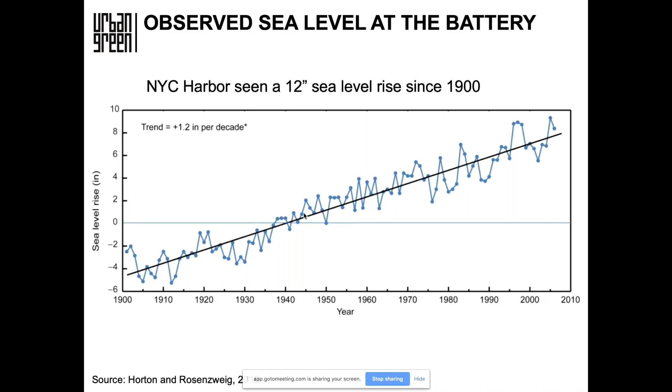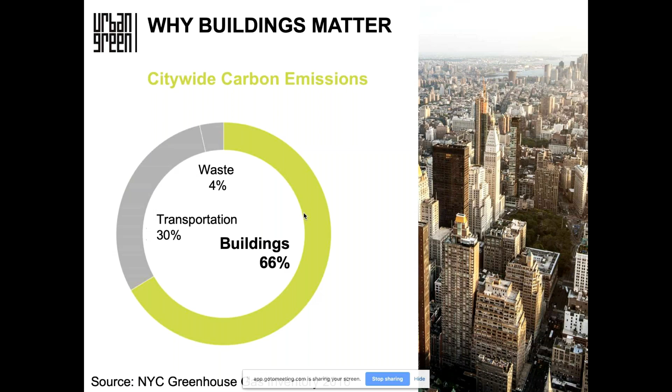In New York City, given our really robust public transportation system, climate change is driven primarily by buildings: the fuels that we burn in the buildings and the electricity we use there. The numbers are different if we were talking the US nationally. About a decade ago, we started working on building policy in New York. We realized something quite dramatic when we looked at the data. Although there's 1 million buildings in New York, a very, very small number of them actually represented most of the square footage and most of the greenhouse gas emissions.

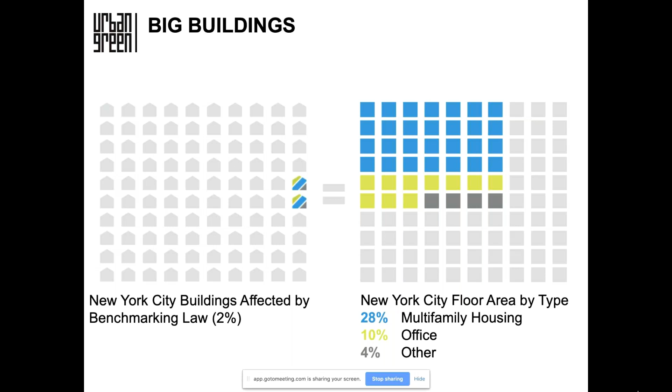And so just 2% of the buildings in New York, or about 16,000 properties, is about half the square footage of New York and about half the emissions. These are the buildings over 50,000 square feet or 4,600 square meters. And if you reduce that a little further to the buildings over 25,000 square feet, or 2,300 square meters, that's almost 60% of the greenhouse gas emissions and energy used in New York City. So the things I'm going to be talking about in this presentation are all focused on these big buildings.

One of the things that may be a little different about New York City than some of your jurisdictions is that the things we'll discuss were all laws or policies enacted by the city itself. We have the power to enact laws on anything that the state or the federal government hasn't already enacted laws on or is somehow preventing us from doing. So we have our own building code, our own energy code, consumer affairs provisions, we can create misdemeanors. So all these policies we can do here.

I'm going to go back in time a little bit and just talk briefly about the almost decade that we spent in New York City really experimenting with the question of whether more information would drive market forces to make economic decisions that would drive energy efficiency. And those are encapsulated in a number of laws affecting these big buildings I've referenced. The first is a requirement that the big buildings measure their energy and water use every year.

And the theory behind this was that would enable these owners to start comparing. They could compare their building to their neighbors. They could compare the building to other buildings in their portfolio. They could compare their building to itself in past years. And if their building is using more energy, they can start asking themselves, what's different about my building? Maybe see an opportunity to save money. And if they've done things and they are seeing savings, they can verify that stuff's working.

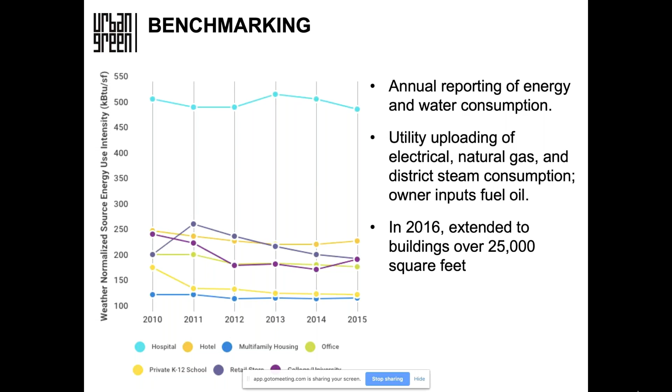The second law is one that requires these big buildings to do an audit and retrocommissioning every 10 years. An audit is an assessment by a consultant of capital systems in a building. They go through and identify opportunities to improve those and save money. And commissioning is retuning of buildings, the same way you would retune a car.

You go through, change fans, change belts, filters, check that valves that are supposed to be open are open, and those supposed to be closed are closed. It's very customized to individual buildings. The primary concern when this law was passed was that there would not be enough professionals to do this work because it was highly specialized.

And what we've seen over this almost decade was there was actually a flood in the market. People entered the market to provide these services at the level that owners wanted, and most owners wanted just to comply with the law. So we saw a commoditization of audits and commissioning services in New York. The average one is not as robust as it was before these laws came into effect.

What we did get that's immensely valuable from these laws is a much deeper understanding of how energy is used in big buildings in New York City. Urban Green analyzes this information every year in conjunction with the city. For example, on the screen you can see our estimate of energy use breakdowns in various building types in New York. That has been immensely valuable as we've advanced policy in the city.

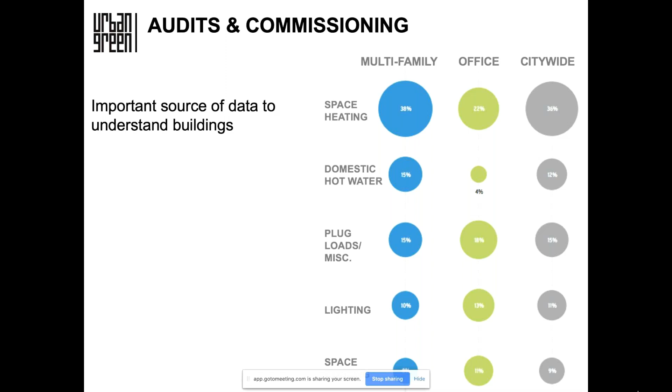And the final law I mentioned is a requirement for buildings to sub-meter their electricity uses in commercial tenant spaces and in common spaces and report the usage to the tenants, whether or not they're billed according to that energy, and a requirement for upgrades to lighting. These laws give owners until 2025 to comply, so it's a pretty long lead time there.

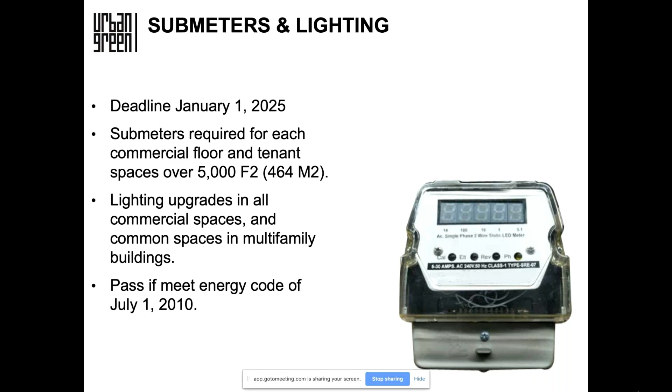These laws have been immensely popular across the United States. There are now about 20 jurisdictions that have some form of benchmarking. Others are doing things like audits and commissioning. The question we asked ourselves, and many people were asking a couple of years back, is what did these add up to? On first blush in New York City, we've seen significant reductions: energy use down about 10% from 2010 to 2015, and greenhouse gas emissions down about 14%.

But when you look under the hood, the situation is not quite as rosy as we might hope from an energy efficiency perspective. About half that reduction is because the power plants got more efficient and produced less carbon. Of what remained, another quarter was fuel switching within the buildings: they stopped burning oil and switched to natural gas, which is cleaner. So only about a quarter of this reduction is due to energy efficiency measures.

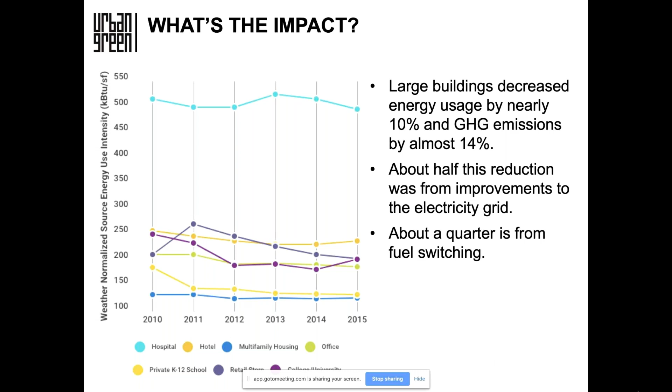This led to a widespread sense that we need to do more, that we're not on pace to address climate change, and that culminated in an announcement by the New York City Mayor in the fall of 2017 that New York City would enact some sort of mandate to reduce energy use in large existing buildings. As I mentioned, there was a lot of agreement. We need to do something different.

What there was not agreement about was the structure, because there was going to be a big price tag to this. So who's going to pay for that? Is it going to be government? Are they going to subsidize it? Is it going to be the owners? Are owners going to just pass these costs on to tenants? That was a huge political question.

And within these big buildings, we have extraordinarily important ones to the social functioning of the city. We have affordable housing, hospitals, schools, religious institutions. How would they fare under the system? And we had a policy structure that was going to impact trillions of dollars and hundreds of thousands of people who work in these industries.

How are we going to figure out all the details of that? So a lot of disagreement. Urban Green stepped into this challenge and brought together the city's building and energy stakeholders for something called the 80 by 50 Buildings Partnership. And we produced a report with recommendations on the policy structure called the Blueprint for Efficiency.

And I can kind of jump to the conclusion and tell you this worked. We had all the stakeholders, all the major ones involved, endorsed our recommendations and endorsed this blueprint, and it was a major influencer on the law that was passed in New York.

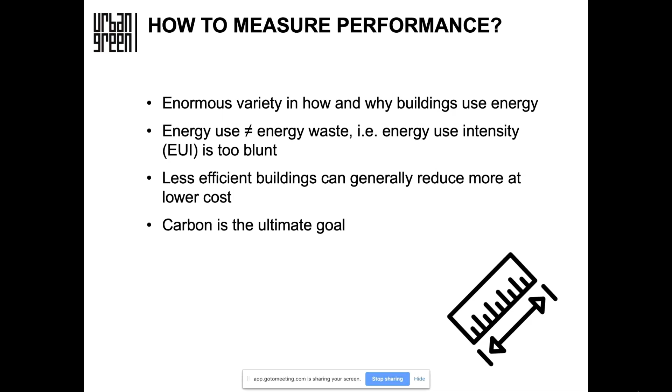So the group weighed many different paths based on different metrics. In very broad terms, those structures fell into 3 camps. The first is a percent reduction approach. That is a uniform percentage reduction applied to buildings across all sectors or in particular sectors. That's a typical approach in a lot of voluntary programs, some of the incentive programs that exist here in New York and elsewhere. And the advantage of that approach is that it meets buildings where they are.

It inherently accounts for the unique aspects of their energy profile. The disadvantage is that it penalizes early adopters. It doesn't account for progress that they have made prior to the policy because it applies a uniform reduction across all buildings. Similarly, it doesn't apply greater reductions to poorer performers, so there may be savings left on the table.

The second path the group considered was a hard cap, or a single limit applicable to all buildings, and having all buildings need to reach that limit and get below it. The advantage there is, on the one hand, a single standard has the virtue of clarity. It also squeezes more from those that are farther above the cap, so it requires greater reductions from potentially less efficient buildings. On the other hand, it's a one-size-fits-all approach. It doesn't account for those many factors that influence energy use.

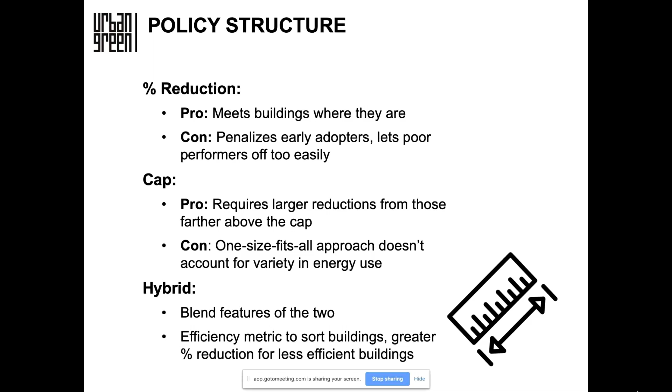A third major question of the policy framework was how far, how fast, or how much should buildings reduce, and by when? Here the guiding star was a stringency that is ambitious but achievable. To put some detail on that, the group looked to existing retrofit programs, what had actually been achieved in large-scale retrofit programs, what was possible based on existing technology, and energy modeling and projections of what's feasible in deep energy retrofits. With that in mind, the group defined a maximum and minimum range that seemed feasible, and that landed at around 20% source energy reduction.

The timeline was, of course, also a critical issue, and the focus here was allowing sufficient time to make retrofits cost effective. That means primarily allowing time for owners to align the work with natural financing cycles, the points when equipment needs to be replaced, and when tenants are moving in and out of units. It also means allowing time to properly sequence and plan projects, and for such a massive industry transition, some time to adapt. Lastly, the group was very focused on enabling a phased compliance timeline to avoid a scenario where you have 50,000 buildings, in the case of New York, all seeking compliance in the year before the compliance year.

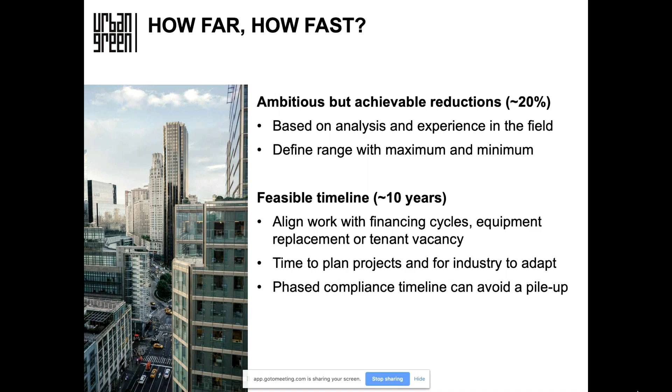The second major chapter was focused on special cases. The aim here was to ask which sectors need some form of unique treatment. Part of that is that some sectors need more help. Russell alluded to this, and we were focused in particular on affordable housing, mission-driven nonprofits, and some of the other public interest sectors. They face particular financial and regulatory constraints that make building upgrades more challenging, and there are potential affordability implications. So there need to be unique compliance paths and/or dedicated financing and technical assistance to make sure those sectors can achieve the reductions.

On the flip side, government buildings have typically led on green building, and the group focused on ways for that to apply in the context of an energy performance policy as well. Here we're talking about deep energy retrofits at a scale that is really unproven, so there's a need for some sort of proving ground to shine a light for industry and illuminate costs, risks, and solutions. That meant requiring government buildings to go farther and/or faster, to do deeper reductions, potentially on a sooner timeline.

The third chapter focuses on allowing flexibility. The challenge of this section was how to enable flexibility for owners and the market at large to unlock the lowest cost path to carbon savings, that is, to reach the same end target in the most cost-effective manner. The group considered two principal means of achieving that. The first is trading, meaning trading energy efficiency credits or carbon credits between buildings, so buildings with a higher cost of energy or carbon reduction can buy credits from a building with a lower cost.

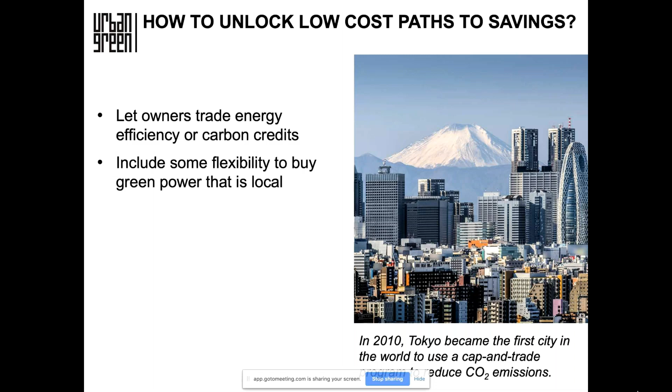And then our final chapter focuses on making efficiency easier. And the premise guiding this chapter is that the ambitious nature of our climate goals is really unprecedented. And so we are talking about an unprecedented scaling up of retrofits. And that requires an equal mobilization of support to help owners reach those goals. That means money in the form of incentives, loans, grants. It also means technical assistance to ensure they have the technical know-how and the resources to implement retrofits effectively.

And lastly, in a standard part of the Urban Green Playbook, when we look to add regulatory burden or pass or influence new laws or policies, we also look for opportunities to lighten burden in ways that make sense, in smart ways. As many regulations get stale over time, they aren't updated for a decade or two. So the aim here is to find smart opportunities to revise existing regulations and thus free up resources and money that can then flow towards retrofits. So that's the blueprint in a nutshell.

I'm now going to fast forward 8 or 9 months later to April 2019, where after a legislative process, typical of a big complex piece of law, New York City passed a groundbreaking building emissions law. In New York, the law is called Local Law 97. It was part of what New York called the Climate Mobilization Act, which was a package of environmental laws all passed at the same time. It was also branded New York City's Green New Deal in a nod to the political moment that we're in.

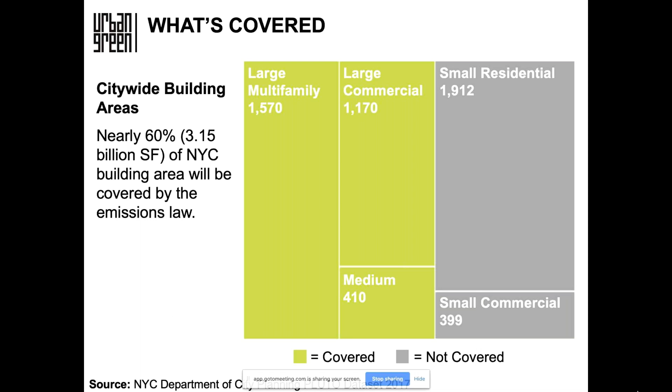The emissions limits that are the centerpiece of the law are based on carbon intensity of whole building energy use. That's all the energy used in a building. So that is a raw carbon intensity metric. It's a measure of metric tons of carbon dioxide equivalent per square foot. And the law sets 10 different intensity limits for 10 different building code occupancy groups. So it differentiates between different uses on the basis of building occupancy.

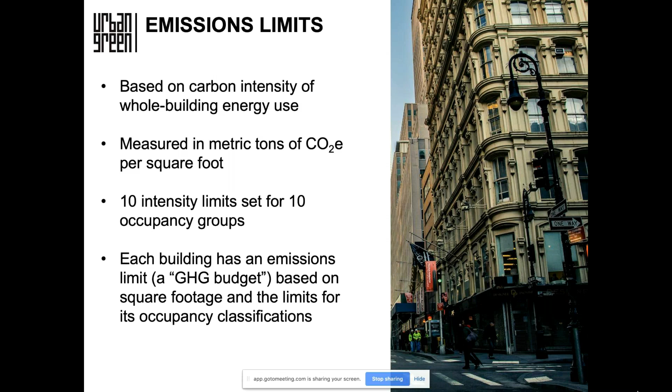That means that each building gets an emissions limit, an aggregate limit, or a greenhouse gas budget, a GHG budget, based on its square footage multiplied by the limits of its occupancy groups. And so a mixed-use building that has part residential and part commercial office would have a composite target or a composite GHG budget based on its square footage for each use multiplied by the appropriate limit.

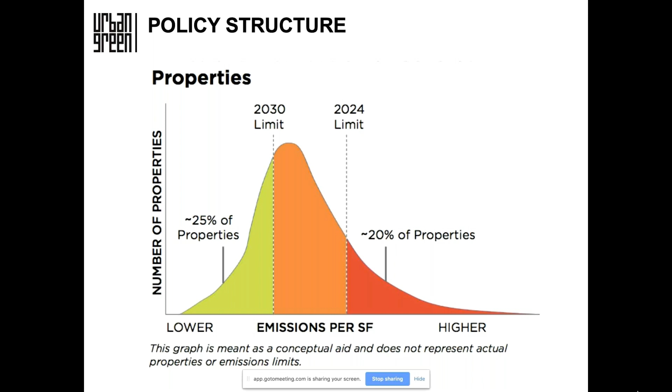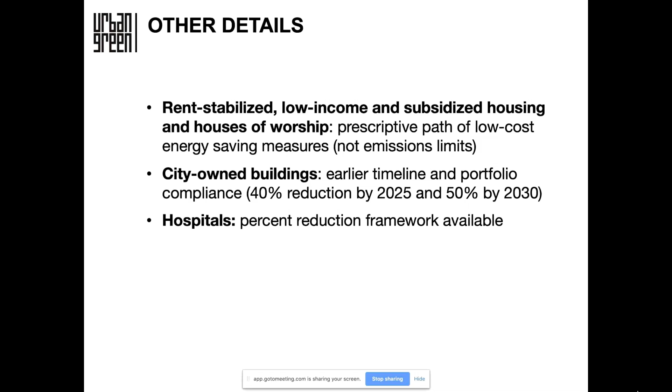So a few other key details of the law. One, affordable housing and a couple other sectors like houses of worship or building types received a different pathway, one based on low-cost energy savings measures, not emissions limits, given some of the concerns of those sectors I discussed before. City-owned buildings did in fact get an earlier, deeper, faster target. And hospitals got the option for a percent reduction framework given the intense energy use and the important public purpose of those institutions. So how will owners comply?

We've grouped the compliance options into six numbers here. The first is reduce energy use. That's your typical energy efficiency or energy conservation. The second is reduce the carbon intensity of your energy, for example, by switching fuels. The third is buying renewable energy credits. That is part of the flexibility included in the law through alternate compliance paths. And the law actually allows up to 100% offset through green power credits. But it must be local green power. And actually the geographic definition is very, very strictly local. So it has to be in New York City or directly feeding into New York City.

The fourth is actually a couple different options grouped together, but there are a few offsets or deductions for carbon offsets. That's your more classic planting trees or credits for trees being planted, or clean distributed energy resources, things like energy storage. The details of those have yet to be specified and will be developed through rulemaking. Five, a compliance option we view as absolutely critical, given the structure of the law, is carbon trading or energy efficiency trading. The law does not include that as a compliance option, but it contemplates that coming in future with a requirement to study it and develop an implementation plan. And then lastly, there is of course the option of paying fines, which will sort of set a shadow price for some of the alternate compliance options.